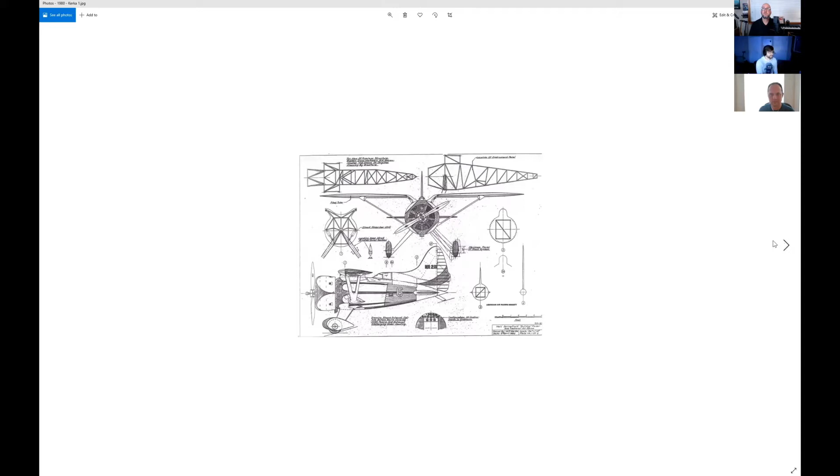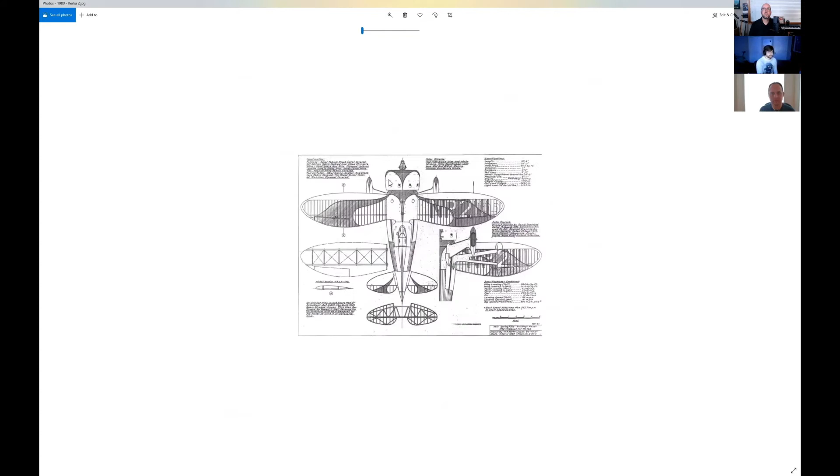I'm going to show real quick, Tony, these images that you've seen before a few times, where we have these different drawings. This is just to run it down for people who are coming into this new. This is the drawings by Kirka, and this shows sort of the classic idea of what this airplane looked like from the top. And then eventually we have a guy named Clements who came along and gave us this view. What we're going to propose after looking at the photos is that this view is more correct. The sweepback in the wing is just more correct.

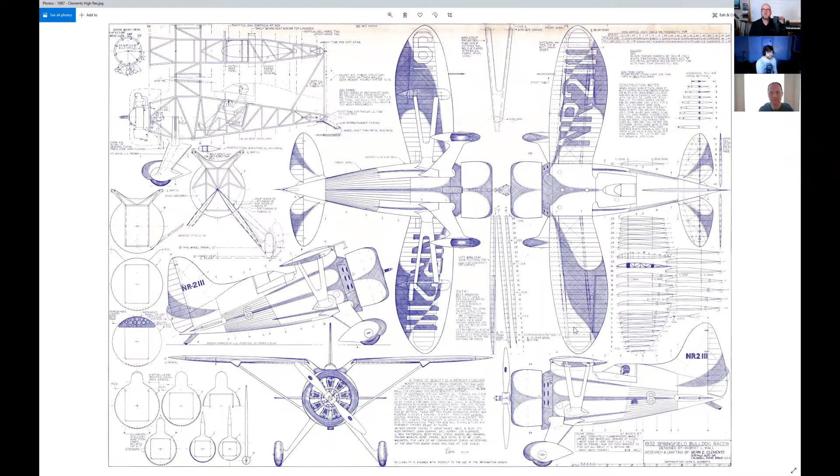The spars sweeping back must be correct. There's a lot of controversy about that because of things that are in the historic record. But it seems like when you look at the actual pictures, it pretty clearly supports the view that this guy Clements had. And I think what we do now is just kind of walk through that.

And Tony's the one who's really got to make, he has to have drawings that we can make an airplane out of. At some point, we have to be able to say this is what the plane looked like, this is what we're building. So that's why, Tony, you're here to kind of review the work.

And I think, Josh, what you do is just walk us through the process you went through and show me what you showed me the other day, and just convince us that the airplane looks a certain way. So one of the things I want to touch on is the difficulty of some of these photos.

Especially the photos, like we talked about, that don't have viable geometry in the background. So there's a certain amount of creativity that has to be exercised in getting things to line up in a reasonable way.

So that's finding straight edges wherever you can, drawing straight lines between objects that are relatively straight to each other. And so I had to go back and do that with this photo in particular, because there's just not enough background geometry to do a proper kind of planar breakdown.

Maybe we should explain a little bit why this particular photo is so significant to us. Yeah, so this photo is really significant because of the shadow. It appears there's a lot of sweepback in the shadow.

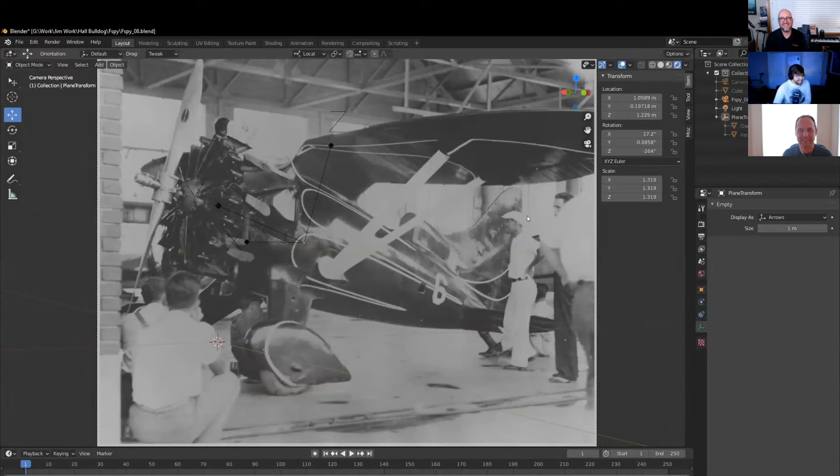Okay, let's see, I'll turn it to wireframe so you can see what's going on here. This one is really neat because the tail lines up a lot better, and I think that's because of the better matched geometry from the rafters and whatnot we have up there. We get this front wing that lines up really well, but the rear wing doesn't line up very well.

That could just be a slight placement error of the aircraft, or I don't know. But this is the Clements, and it matches pretty all right. And then this one is the Kirka. The Kirka's wing doesn't line up quite so well, and these planes are in the exact same position as each other—I didn't move one plane and match it separately. I have the planes lined up right on top of each other, and then I position them, averaging out their positions, so each one's going to be a little off in its own way because it's an averaged position.

So real quick, I'm just going to throw out the theory that one of the wings has sweep back and not the other. What do you think?

Clearly. Do you want to fly in circles? Yeah, it's a racer. All right, sorry, okay, don't mind me. Don't mind me. Yeah, no, you're good.

Interesting how much thicker the chord is at the gull section in the Kirka there. It definitely looks... the leading edge looks good, and then the trailing edge is quite a bit thicker. And both of them, the gull is too shallow of an angle—it looks like on both of them.

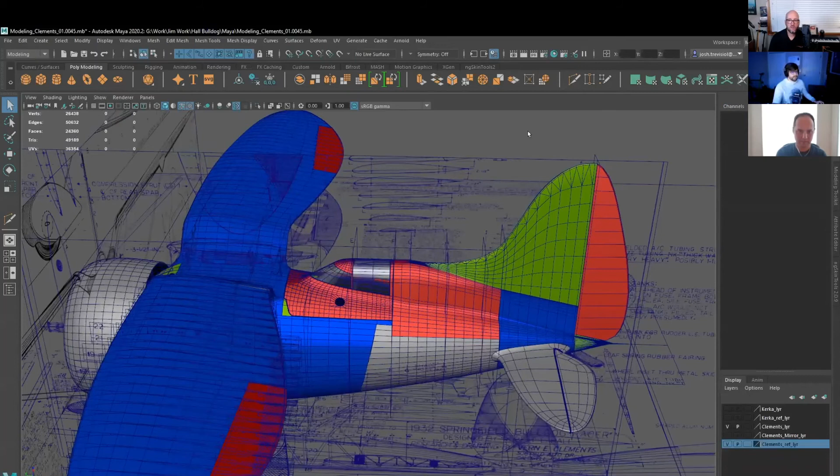So the current state right now is mostly based on Clements. I still have to go back and do some of the adjustments we were talking about, especially the tail. But I want to make sure those adjustments are done to a really good match, so we're not just adjusting to a bad match and then working with bad variables.

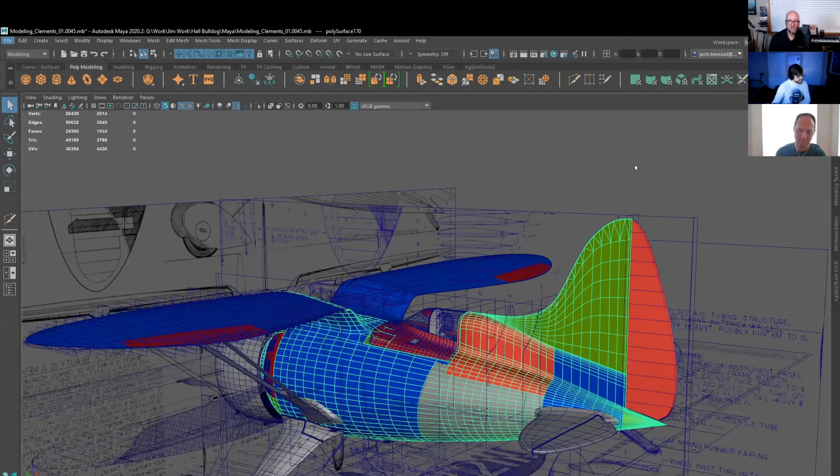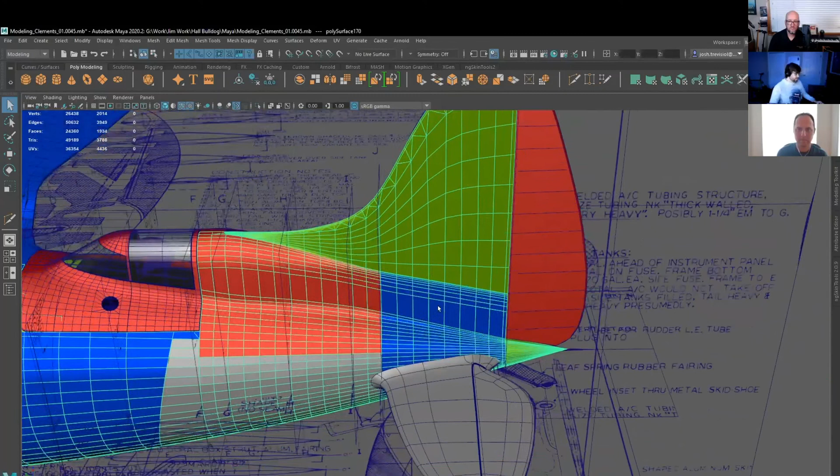So it's kind of refining the matches a little bit, then refining the geometry, refining the matches, refining the geometry, going back and forth with that. What I've got here is this model based mostly on the Clements fuselage, with that little insert we talked about with the canopy right there, and I'm just working my way down along the tail fin right now. The next thing I'm going to hunker down on is the horizontal stabs. Yeah, that's the plan at least.

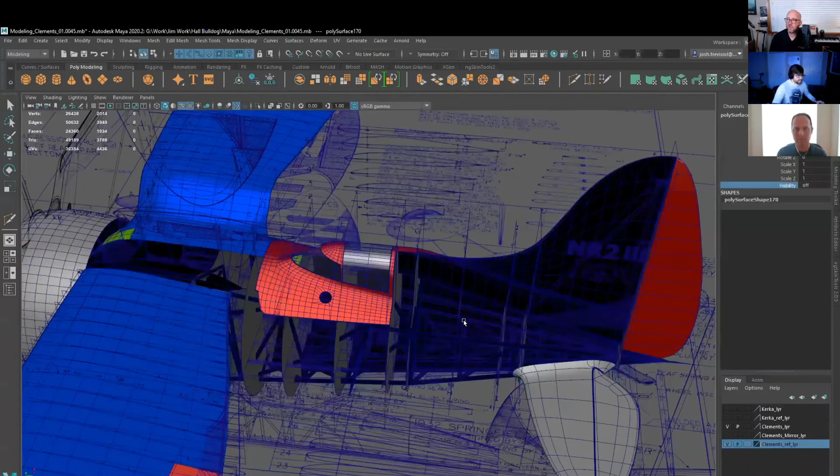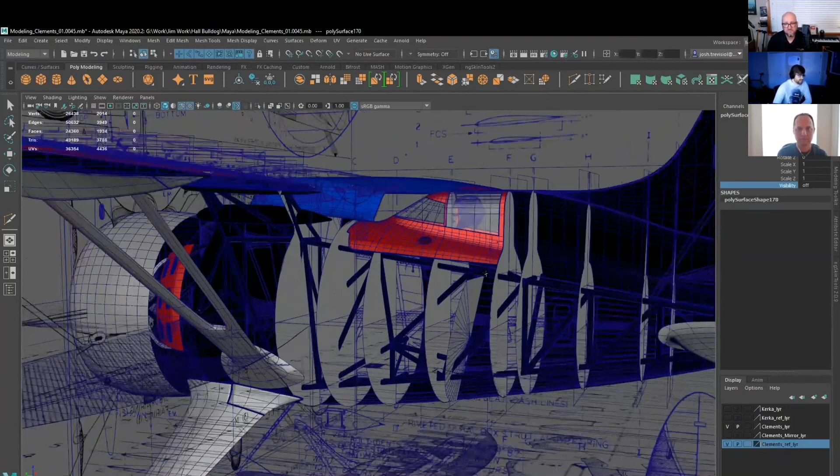And then what about the internals of the airplane, have you looked at that at all? We're talking about the interior chassis and whatnot, the framework. There's a little bit of that kind of roughed out right now, mostly based on the photographs you sent me of your chassis. There's some differences between the chassis on the drawings and the chassis in your photos—some additional frame, structural implementations. So this is kind of a mixture between the two currently—let me turn on the two-sided lighting so you can see it better. It still has a lot of work to be put into it to really match up.

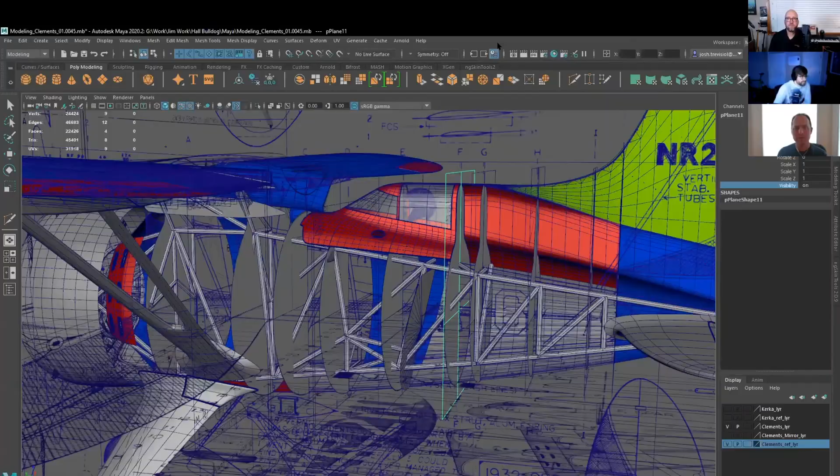I do have a photo that came in that I'd like to show you, if you can give me control again. Just out of curiosity, so all our viewers understand the level of dedication—how many hours do you have into that model at this point? I don't know, I was kind of scared to think about that.

It's less the amount of hours that are specifically in that model, and more the amount of hours that are in refining the information we're using to make the model. Right, and plus you're an expert on this, and what would take me a lifetime, you can do in 10 minutes. So yeah, your whole life you've been working on this model, you just didn't know it.